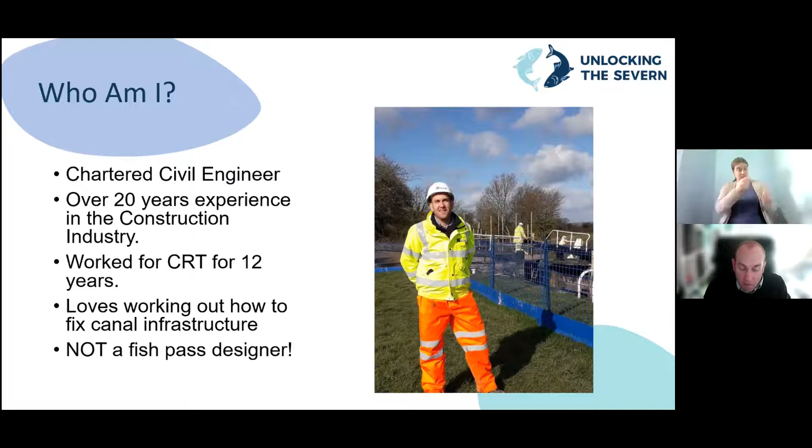I undertake a variety of roles, but my primary task has been to take the outline proposals for the fish passes, manage the detailed design process and ensure we have a buildable design, help resolve any issues found during construction, and perhaps most importantly, ensure that what we build meets the requirements to allow fish to use these structures. One important thing to note is that I'm not a fish pass designer. I work very closely with a team of experts who provide the information and guidance needed to ensure the structures work from a fisheries perspective.

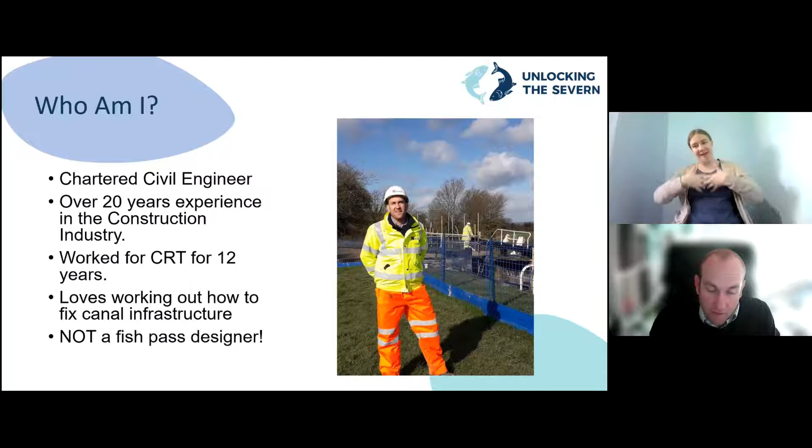So to start with, why do you need fish passes on the River Severn? During the Industrial Revolution, the River Severn became very important for carrying goods and materials. In 1824, it was noted that the river is navigable the whole way, but navigation is very much impeded by the lowness of the water in summer and by the floods in winter. In the 1840s, navigation on the River Severn was improved by the construction of a series of weirs and locks.

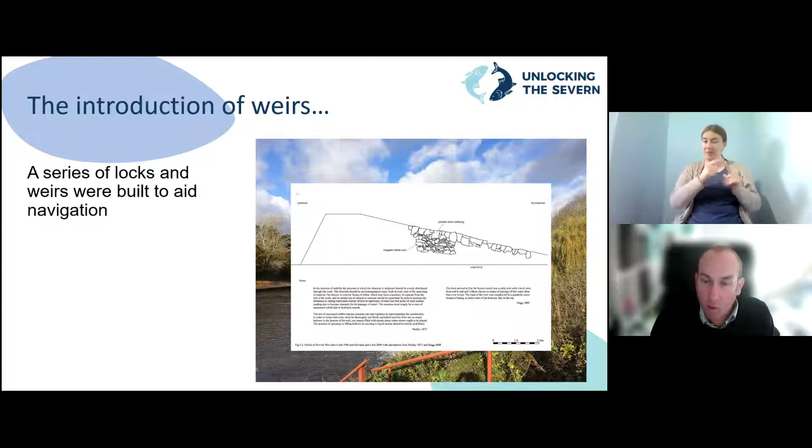This photo shows a typical weir on the River Severn. These are large structures designed to increase the depth of water upstream. The cross-section shows that they were constructed from large rocks encased in an early form of concrete. The water level upstream is roughly 2 meters higher than the water level below. Almost immediately after the construction of the weirs, the impact on migratory fish was noted, as you can see from this quote from a fisheries report in 1862: The finest river in England is nearly ruined by building walls across it, sufficient to stop everything except a large and powerful animal.

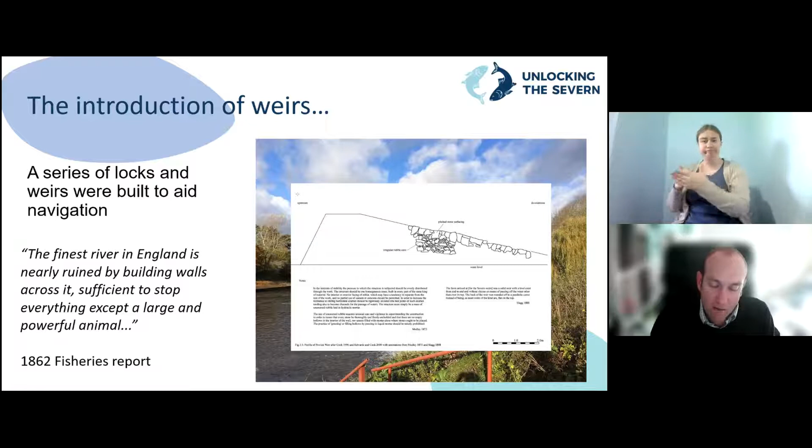Works were undertaken to improve fish passage relatively soon after construction of the weirs by the provision of notches in the weir crest to give a flow of water for the fish to swim up, which is what you can see in this photo here. This is Diglis before we've done our works, and this was the original fish pass. This worked for more powerful fish, such as salmon, but didn't help weaker species, such as the twaite shad.

So where are the weirs? Weirs and locks were constructed along the river in 6 locations: at Gloucester, Upper Lode, Diglis, Bevere, Holt and Lincomb. The bottom 2 weirs are tidal, so the fish can simply swim over them at high tides. Our project has therefore focused on fish pass provision at the weirs around Worcester.

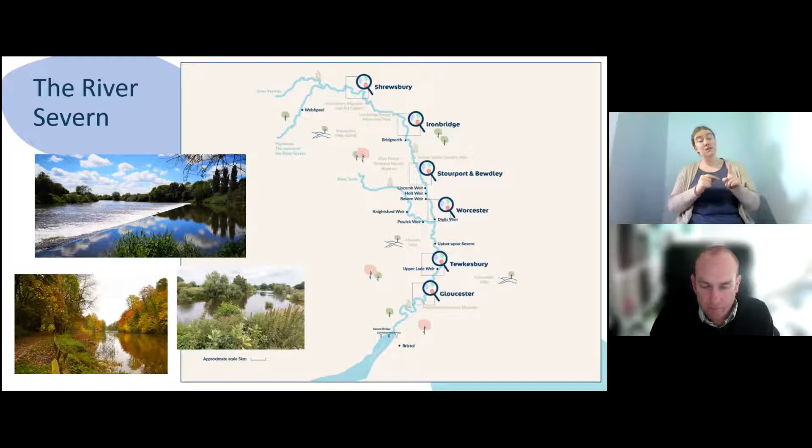If you've attended other Unlocking the Severn talks or events, you'll know that our target fish is called the twaite shad. The populations of this fish were devastated by the construction of the weirs as they were not particularly strong swimmers and were unable to make it over the weir at Diglis. From a design perspective, by targeting the weakest swimming fish on the River Severn, it should mean that all other fish will be able to use the new fish passes.

So how do you overcome the weir problem? The simplest method to enable fish passage is the removal of the obstruction. This approach has been taken at Powick Weir on the River Teme. Here, the existing weir has been partially removed and the riverbed regraded so that it is a much shallower gradient that allows fish to swim up.

Unfortunately, it isn't possible to remove the River Severn weirs without impacting on the navigation. Therefore, it is necessary to design a new structure adjacent to the existing weirs that allows fish to pass. So what is a fish pass? It is defined by the Environment Agency as any form of conduit, channel, lift, other device or structure which facilitates the free passage of migrating fish over, through or around any dam or other obstruction, whether natural or man-made, in either an upstream or downstream direction.

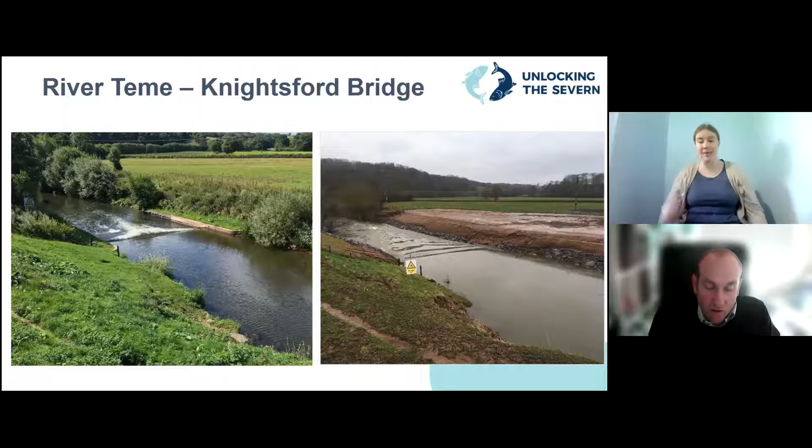There are many different types of fish pass that could be used. A good example of a more simple structure is here at Knightsford Bridge Measuring Weir, again on the River Teme. In this case, it wasn't possible to remove the weir, so instead the weir length was increased by placing rocks on top of the existing weir. This reduced the slope gradient of the weir, which in turn reduces the speed of water as it flows over it to the speed at which our target fish can swim up it. Where there are natural constraints and space is limited, more sophisticated fish pass structures are needed.

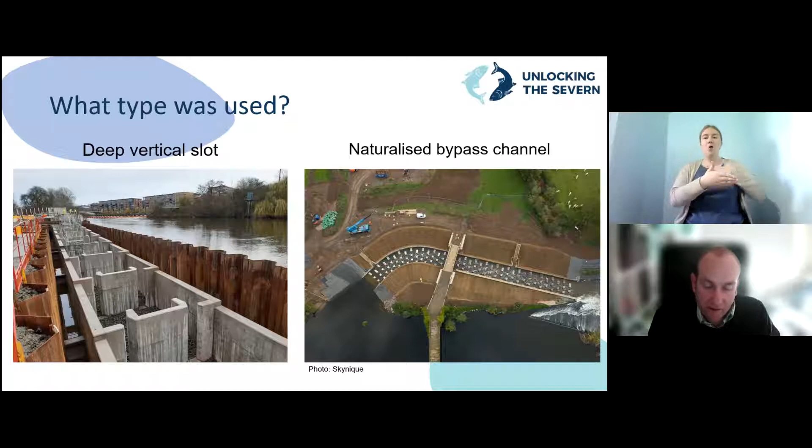For the weirs on the River Severn, 2 different types of fish pass were chosen. Deep vertical slots at Diglis, Holt and Lincomb, and a naturalised bypass channel at Bevere. The deep vertical slot fish passes have been used at the sites where less space was available. Both types of fish pass have a series of small steps designed so the fish can use their burst speed to get up to the next level, catch their breath before going again. How the structures achieve this is very different, and I'll explain this in more detail.

This talk is going to primarily focus on Diglis Fish Pass, which is the first weir requiring improved fish passage on the River Severn, and I'm able to explain the key design features along with the specific challenges of building them on the following slides. The key features of the deep vertical slot design used at Diglis are the gradient is greater by approximately 50% than a naturalised bypass channel, as less space was available. The overall fish pass length is approximately 80 metres compared to 120 metres for the naturalised bypass channel at Bevere.

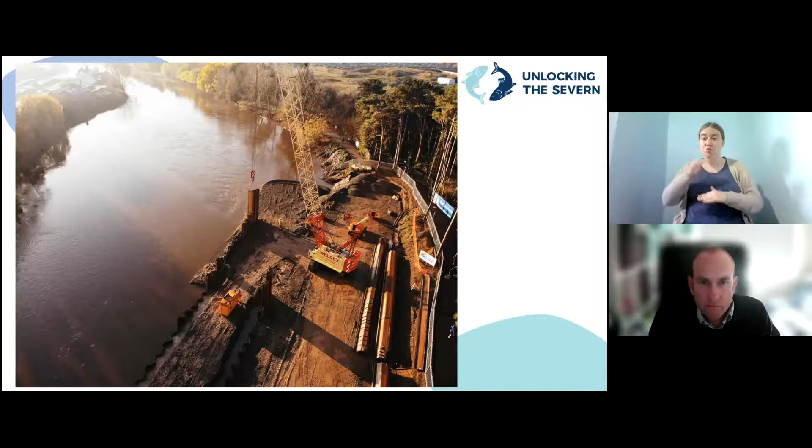Very long and heavy piles form both the temporary restraint and permanent outer walls of the structure. This is why they're called deep vertical slots, as the bottom is up to 7.5 metres below the adjacent riverside path, which is roughly the same as a 3-storey house. The ground inside the piles, after they were installed, is removed. The photo on the left shows us undertaking this. This was a massive undertaking with over 4,000 metres cubed of material excavated. This is roughly the same as 3 Olympic-sized swimming pools.

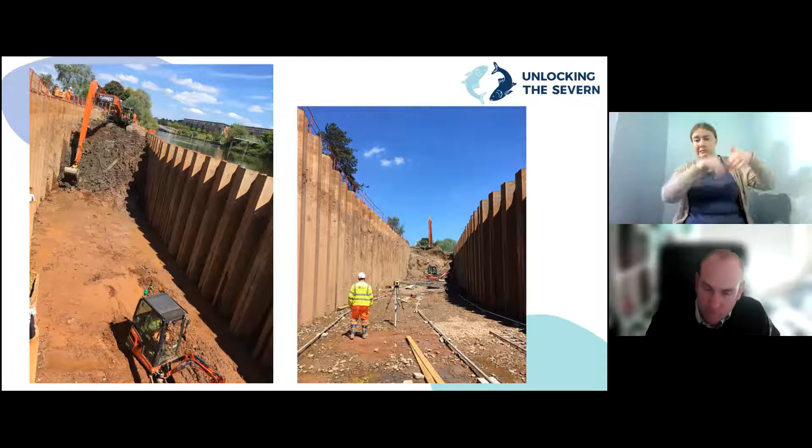The fish pass itself was constructed inside the piles using reinforced concrete. The steps for the fish to climb up are formed by the construction of a series of pools with what we call nibs and C-sections at the upstream end. Together, these create a small slot that the water passes through so that the target fish is able to burst through before resting in the pool above. The photo on the right shows the construction of these nibs and C-sections. This may be easier to understand by looking at the plan drawings of these pools.

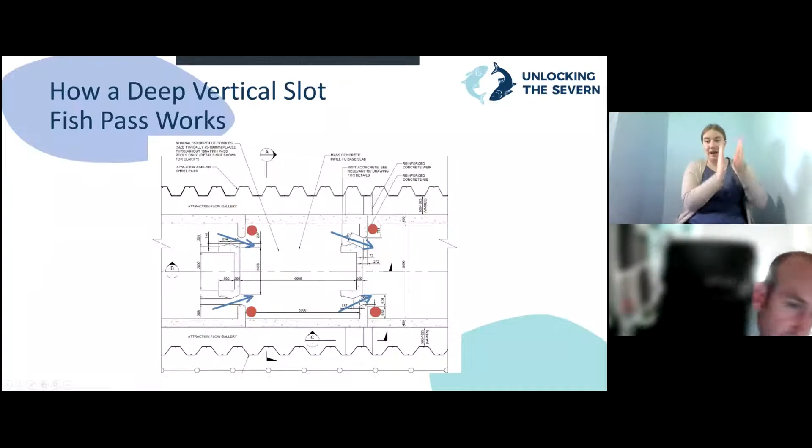Water passes, I'll just go back, so these are the nibs here and the C-section here. And in plan, we've got the nib and the C-section. Water passes between the nib and the C-section, as I've shown by the blue arrow, before being held up in the pool below, and the process repeats as it passes down through the fish pass.

The flow of water should create eddies and calm spots where the fish can wait, as shown by the red dots, before the fish dart through the gap into the pool above. The water speed is at its fastest as it passes through between the nib and the C-section, but it's been designed so that it doesn't exceed 2.5 meters per second, which is slower than the fish's burst speed.

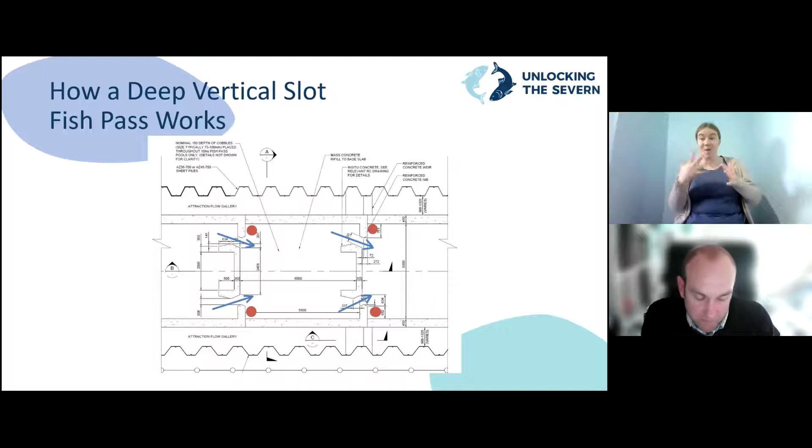In this sketch, I've tried to show in blue how the water will step down as it passes through the fish pass. I think it's easy to understand how the pools will form a series of small steps for the fish to swim up.

At the bottom of the fish pass, the water flows come together through large screens designed to smooth the flow of water and stop fish from swimming up these channels.

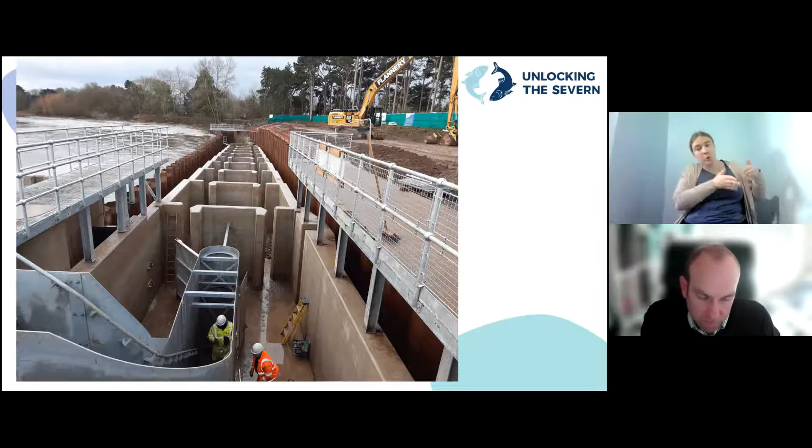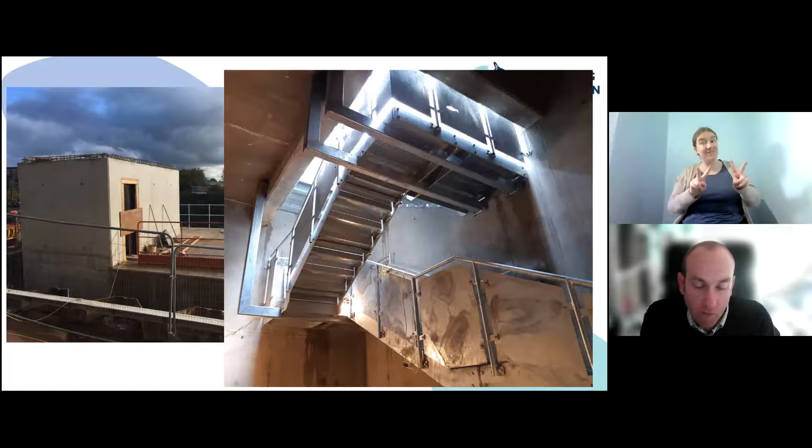At Diglis Fish Pass, there is an underwater viewing gallery and window that will be used for scientific monitoring of the fish using the pass and as an education facility for schools and members of the public. The building on top of the viewing gallery has been designed to go underwater when the river floods and has a waterproof door to stop water entering the building.

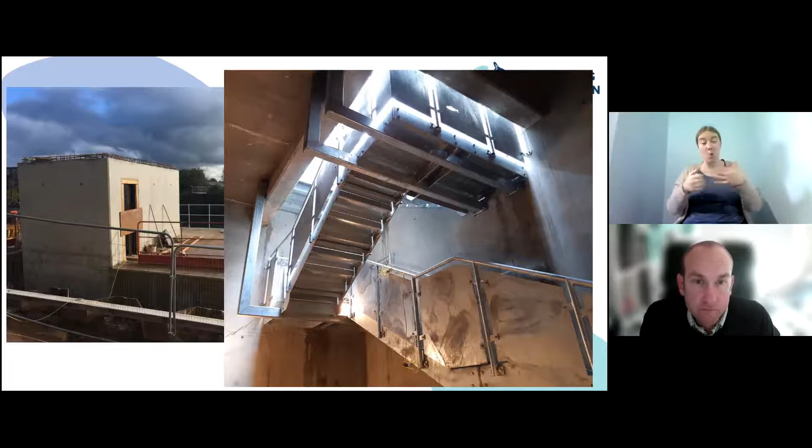In this photo, you can see our underwater window that we've designed to withstand being submerged by over 8 meters. We had to go to a specialist that supplies windows to the Sea Life Centre. The window is at the largest size that can be manufactured in the UK in one piece. The window is constructed from 4 laminations of glass, each 20 millimeters thick and having a total weight of 1 ton. The front lamination is designed to be replaceable should it be needed in the future.

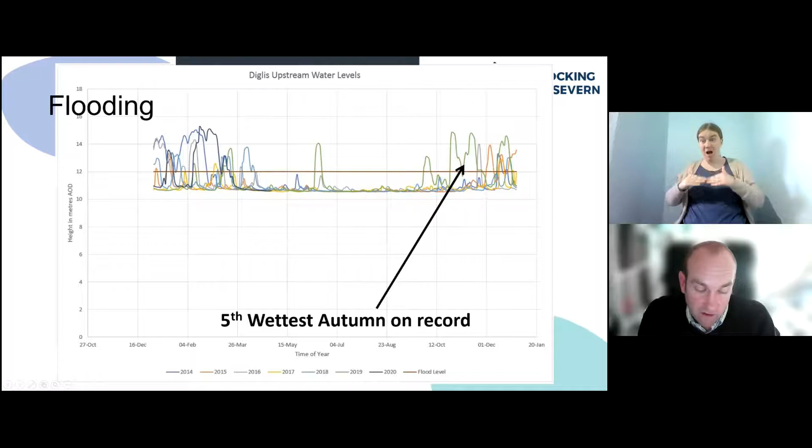We decided to protect the works up to a level of 12 meters, which is shown by this brown line. And as you can see, the maximum recorded flood level is about 15.3 meters. And this green line shows the river level in 2019 and 2020. So quite often we were above our flood level. And at times the works area was over 3 meters underwater. And here's a few photos showing that. We were flooded out numerous times.

However, at Diglis, the site tends to flood for 5 to 10 days before dropping, and it allowed the works to progress once it had dropped. In the left-hand photo, you can just about make out the fence to the edge of our fish pass, and in the right-hand photo, you can see the flood door doing its job and stopping the water getting into our building.

Thought I'd share with you some key construction issues that were overcome during the works. I mentioned the piles that we used earlier. We used a specialist during the design phase. We decided to use a pile type called an AZ pile, which is basically shaped like a Z, hence its name.

And we planned to install them by drilling some big holes in what we call the clutch positions, which is where they join together. So if you can see my cursor in this position and in this position, we used the machine that we can see on the right to drill these big holes that allowed us to then break up the rock below that they were going into to allow us to put these piles in.

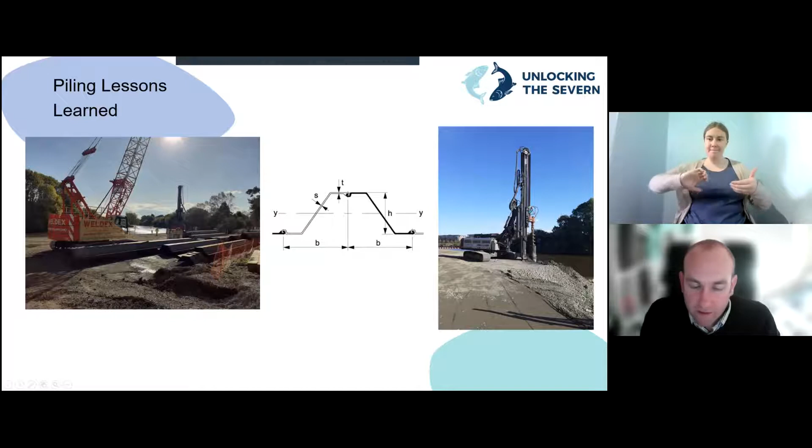These AZ piles were supplied in pairs, and because of that, the distance between these crimped positions was about 1.5 meters. What this meant was the big pile hammer we used didn't quite fit over the top of the pile. You can just about make that out in this photo on the left, where the hammer in red is trying to sit on top of the pile but isn't quite big enough to go all the way over the top.

This meant a lot of the energy from the pile hammer wasn't properly going into the pile itself, and we started to bend over the top of the piles. What we needed to do was weld strengthening plates, which you can see in this photo, to strengthen up the pile so we could hit it hard enough with the hammer to get it into place.

We learned from this when we built the similar fish pass at Lincomb, where we used a different type of pile called a U-shaped pile, which is a bit shallower and less wide, so that the hammer fits completely over the top, and we found that we could get them into place.

The other problem we found with the AZ piles was that they stretched slightly when manufactured and joined together, meaning each one was about 10 to 15 mil too long. So the overall length of the fish pass at Diglis is about 1 meter longer than what we intended because of that.

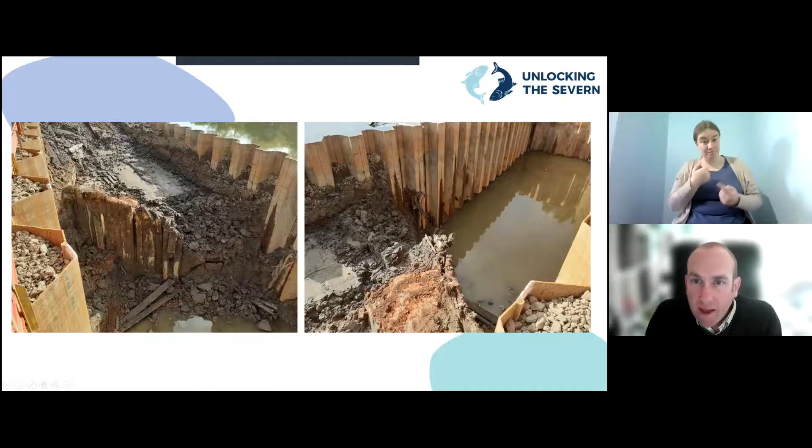You can just about make out the weir on the right-hand photo, and exactly in line with that, we found these timber cut-off piles. They were quite interesting because they had a cast iron point on the end for when they were put in 200 years ago, to be able to drive them through the ground. We then found it had been fully backfilled with clay to try and stop water leaking around the outside of the original weir when it was being constructed.

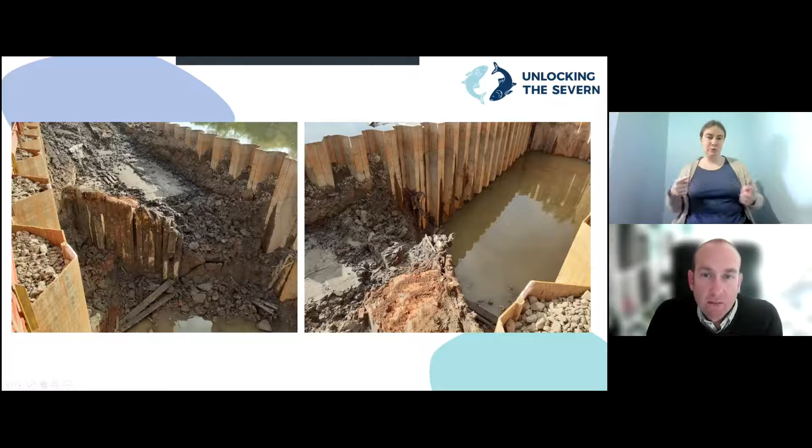We also had some issues piling through the existing weir. As I mentioned at the start of the talk, the existing weir is constructed from an early form of concrete and stone pitchings, and you can see these big boulders on the face of it in both of these photos.

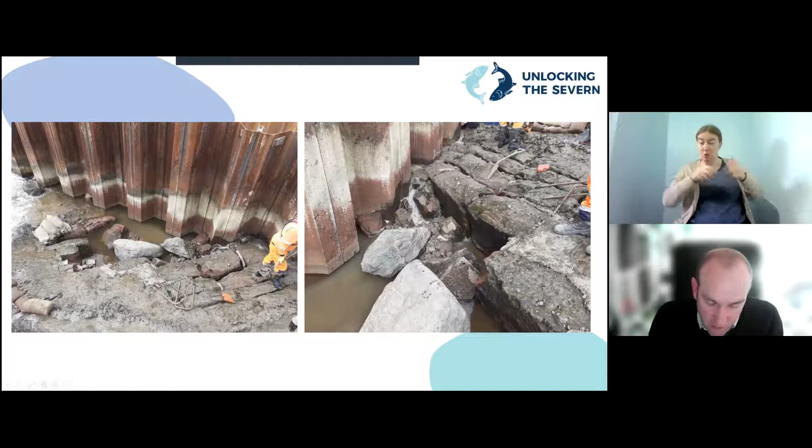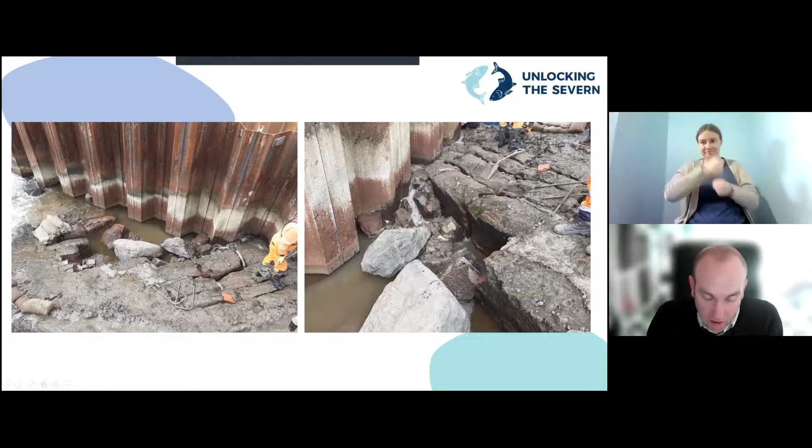We had to construct a platform out across the weir to give us access for construction plant to drill through the original weir itself, allowing us to then drive these piles through the structure. Once completed, we needed to make good the damage we'd caused in this area, to ensure over time that both the new and old structures remain tied together properly.

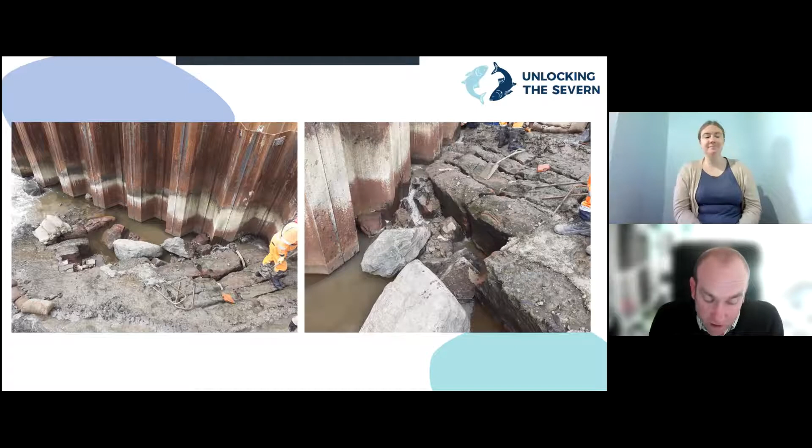The other issue we had during construction was COVID-19. If you've walked past the site on the Riverside Path in Worcester, you'll have seen that we needed to cross the public footpath to get to the works area. At the start of lockdown 1, we had to shut down the site temporarily whilst the situation became clear, so we could work out how best to manage this and the other works to ensure they remained COVID secure.

We've relatively recently completed construction of the fish pass, and it's now fully operational, which has been just in time for the spring spawning season for the twaite shad, which is ongoing as we speak.

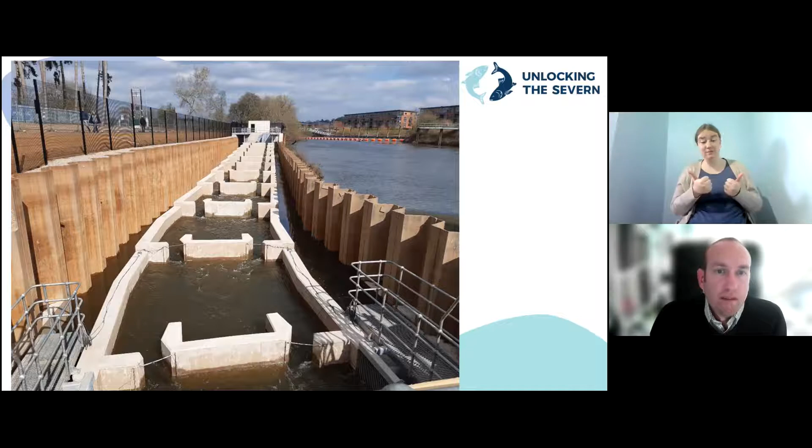So we've got a video of the completed works, which probably will show you better than I can explain. So hopefully this will work.

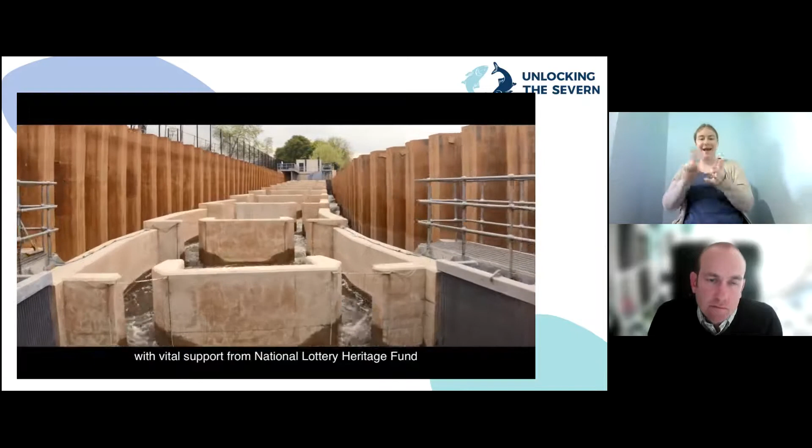Hi, I'm Jason Leach, Programme Director for Canal & River Trust on Unlocking the Severn. This is a once-in-a-lifetime opportunity to restore connectivity for migratory fish on the UK's longest river. Fish migration was severed about 180 years ago with the construction of the locks and weirs to facilitate navigation. The twaite shad population crashed almost overnight and has led it to be one of the UK's rarest fish today.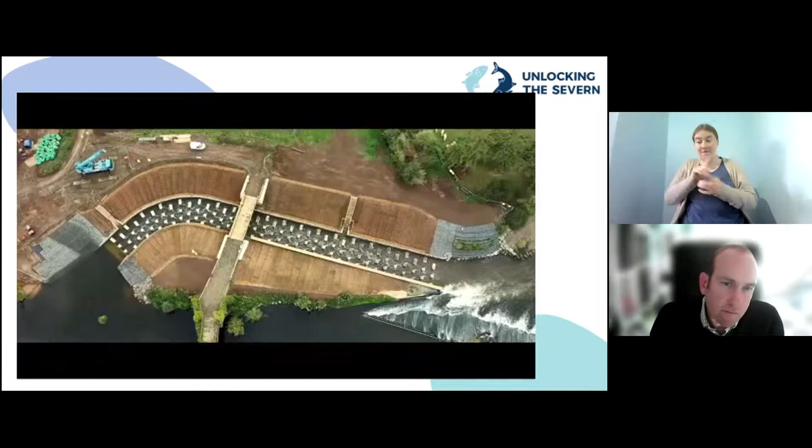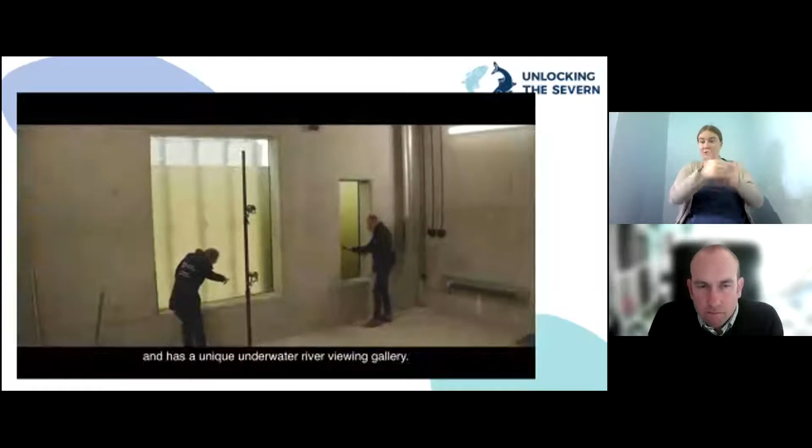We're building 4 big fish passes. Diglis, the biggest, at a massive 100 metres long, 8 metres wide and 5 metres deep, is the biggest deep vertical slot in England and Wales and has a unique underwater river viewing gallery.

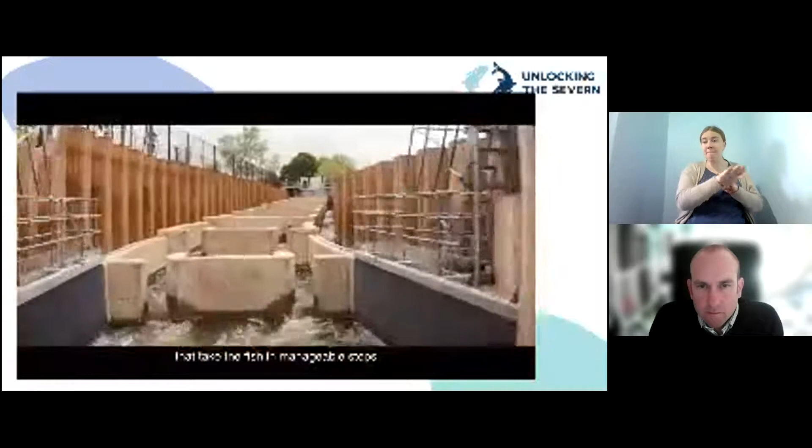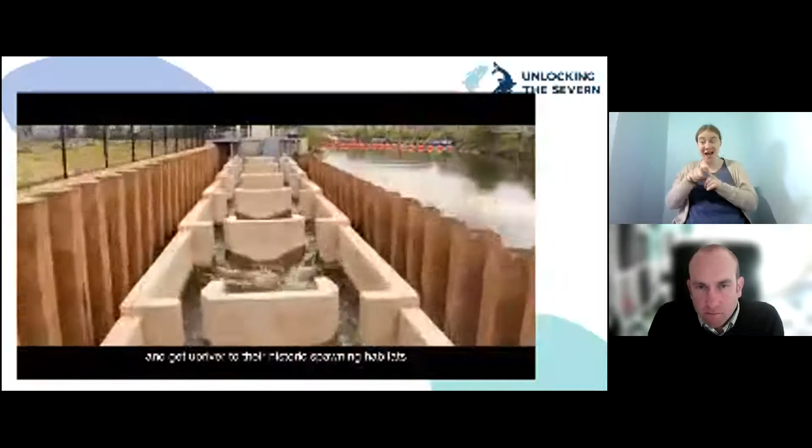The Fish Pass is formed of a series of ascending pools that take the fish in manageable steps from one level at the bottom of the weir to the higher level above it. This year, for the first time in nearly 180 years, Thwaite shad will be able to pass and get upriver to their historic spawning habitats where they'll have a better chance of reproducing. This fish pass will also benefit other endangered fish species, including salmon, eel and lamprey.

The window in the Fish Pass will be used for scientific monitoring with specialist film equipment, but we're also really looking forward to welcoming visitors, and we're going to put in audio-visual installations. Visitors will be able to book a visit to come down into the Fish Pass and see through the window into the flowing river and hopefully see some of its wild fish.

Hopefully you could see from some of the aerial shots how the pools and the sea sections work and create the steps down and the eddies for the fish to swim up. It's been a very exciting time for us, and we've had tons of fish coming past the window, and it's been very exciting seeing them go past and use the Fish Pass. We've had a few Thwaite shad go through over the last couple of weeks, so it's been amazing to be involved and seeing it work.

To complete the story of what we're building on the River Severn: as I mentioned earlier, the other type of fish pass used on this project is called the naturalised bypass channel, and this has recently been constructed at Bevere Weir. So how do these work?

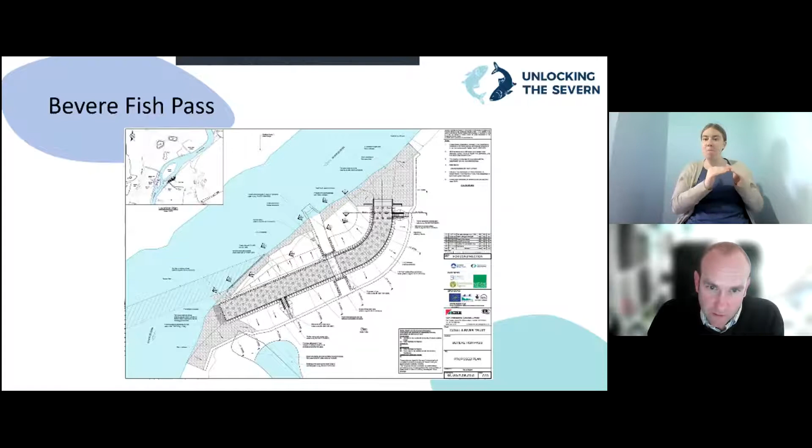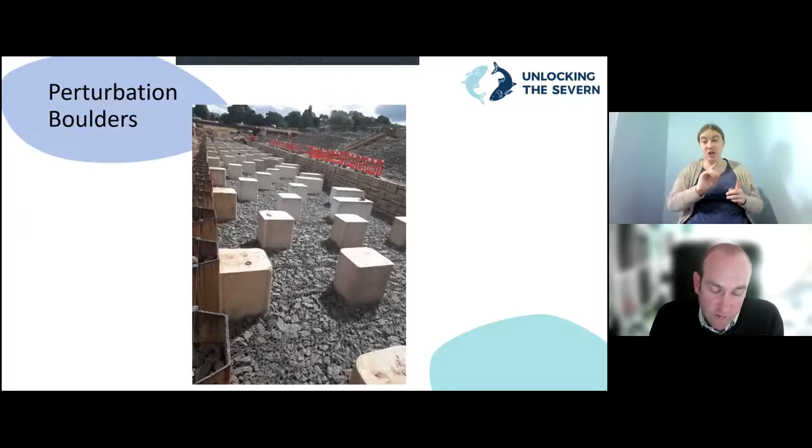These have a series of blocks known as perturbation boulders, which in this plan you can see as all these dots going up through the fish pass, and there's a picture of them during construction. These are essential to the success of this type of fish pass. These boulders have been carefully designed and positioned to break up the flow of water as it passes down the fish pass. This creates a series of water chutes and eddies.

The fish are able to burst through and rest before continuing upstream. So again, I've tried to show that - the resting spot is the red dot and their path is the green lines. So they hide behind the perturbation boulders and dart upstream.

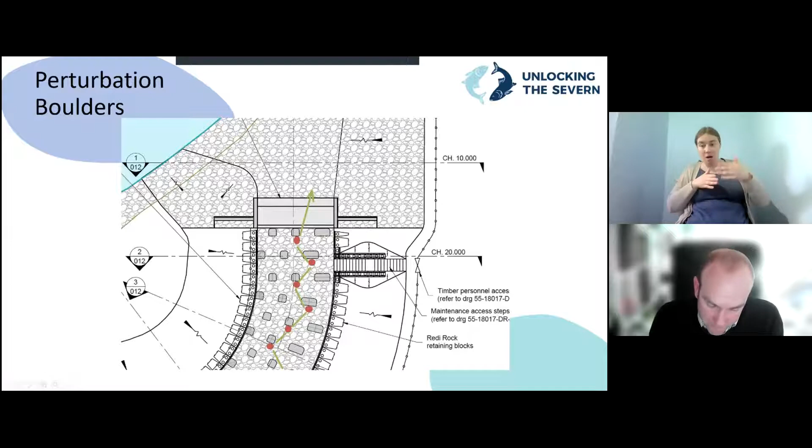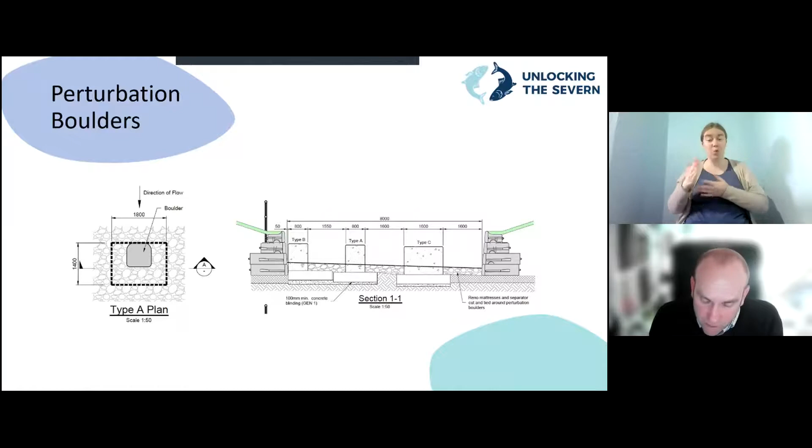If you look closely, there's a plan of our boulders. You can see that the edges of the concrete have been carefully designed to ensure that water flows through the fish pass uniformly. These boulders are much larger than they seem, so they're a bit like an iceberg with much more below the bed level. This is to ensure that they're big enough to withstand the forces of the flowing River Severn for at least the next 120 years.

I've got another video here, a short video showing this fish pass in operation.

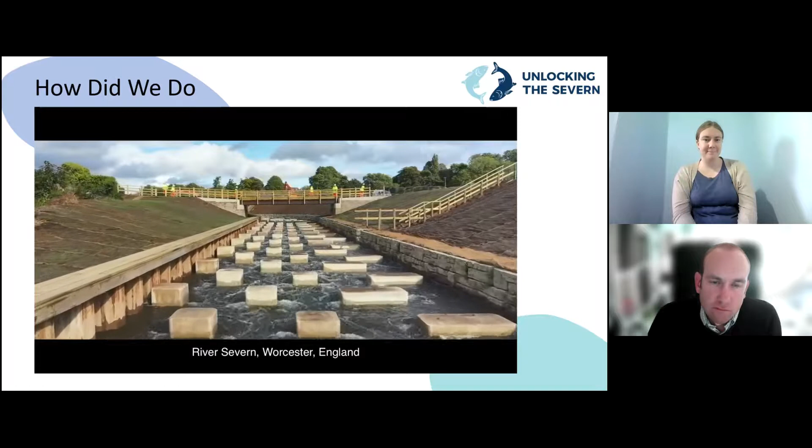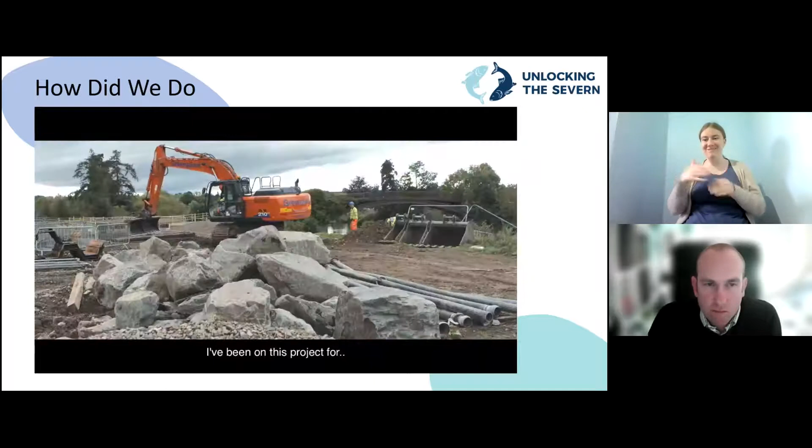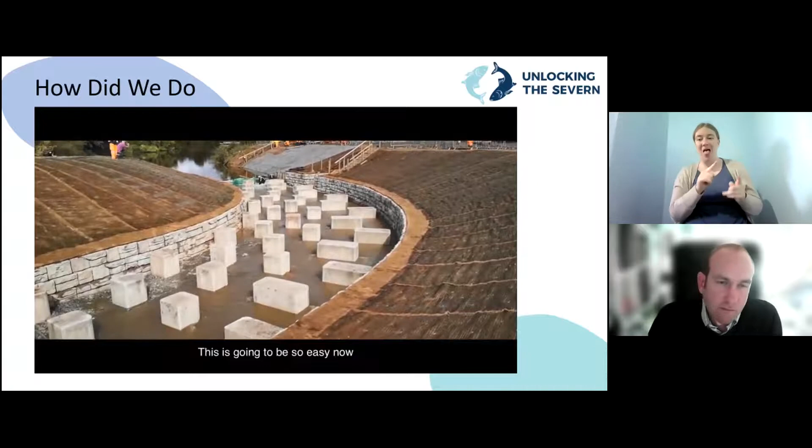Hi, I'm Charles Crundwell from the Environment Agency, and we're here today for the opening of Bevere Fish Pass. I've been on this project for 5-6 years, and it's just so exciting to see the water finally coming around in this common bypass behind us, bypassing Bevere Weir to my right. This is going to be so easy now for fish to come up - salmon, but particularly shad, which is what we're working on here - to move upstream and go back to their historic spawning grounds.

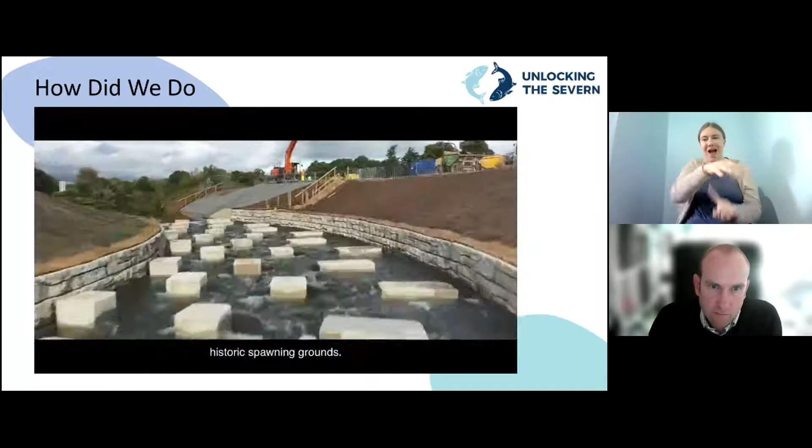So we've completed the fish pass at Diglis and Bevere, which are the first two weirs that block passage for fish on the River Severn. We've also completed, from a fish perspective, the fish pass at Lincomb, which is what we can see in this photo here. We're literally just finishing off the fencing and tidying up the field where we constructed it.

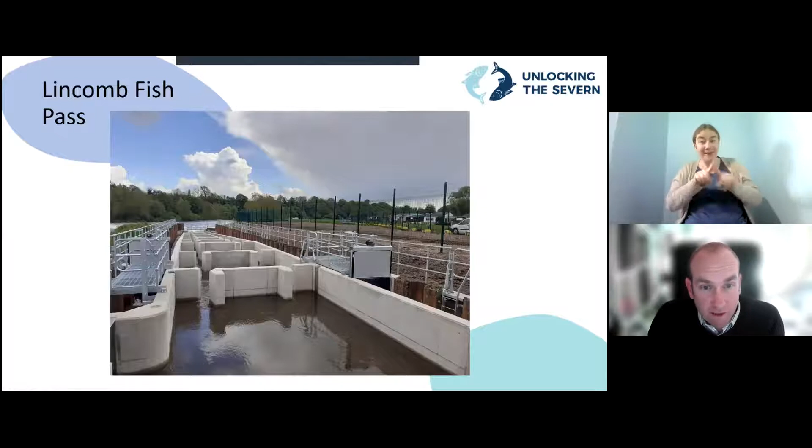So we're now constructing, it'll look very similar actually to this fish pass at Lincomb in between, though we've got a slightly different detail for retaining the ground on either side. We're hoping now for some really good weather over the summer to allow us to complete the construction of this fish pass, and that will be all of them done.

Unfortunately, it's not been particularly good weather in the last bit of May, so we're just hopeful that the weather we've had over the past couple of days continues now to give us a good run at getting this one built.

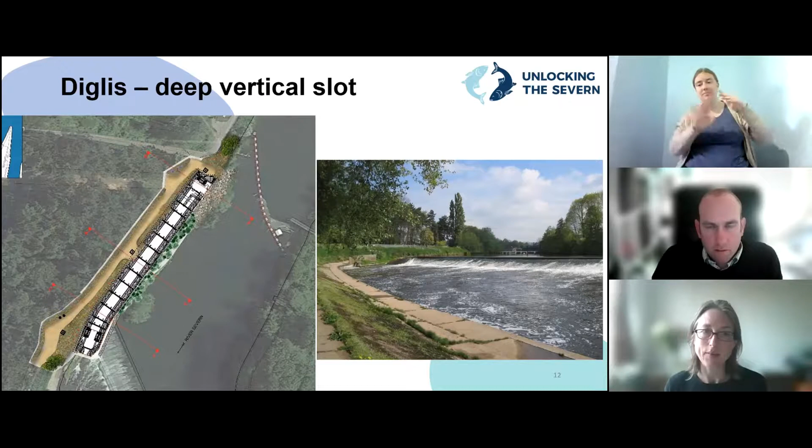I'm just going to go through some of the questions I typed a little answer to, just to check, because Richard may have some things to add. One was a question about how deep each section is, from the surface of the water to the base of the pool. I know we normally talk about the Fish Pass being 5 metres deep, but do you have anything to add on a typical water level within that, Richard?

So the maximum depth inside the Fish Pass itself is about 2.5 to 3 metres. This was during construction, but we've actually got a sloping base of rock that, when finished, fills in the bottom half metre to a metre, and the actual height of the water varies depending on what the upstream and tailwater river levels are doing.

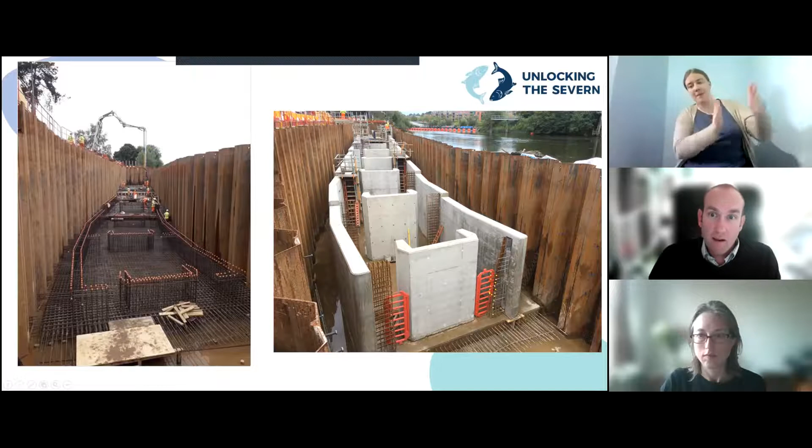At some points this week, for example, the water level downstream is about halfway up the Fish Pass, so you can't see the bottom 3 or 4 bays, just the top of this section. But in the middle of summer, when water levels are low, you'll see all 11 of the bays. And at times, as you saw in the flooding photo, it will be completely covered over.

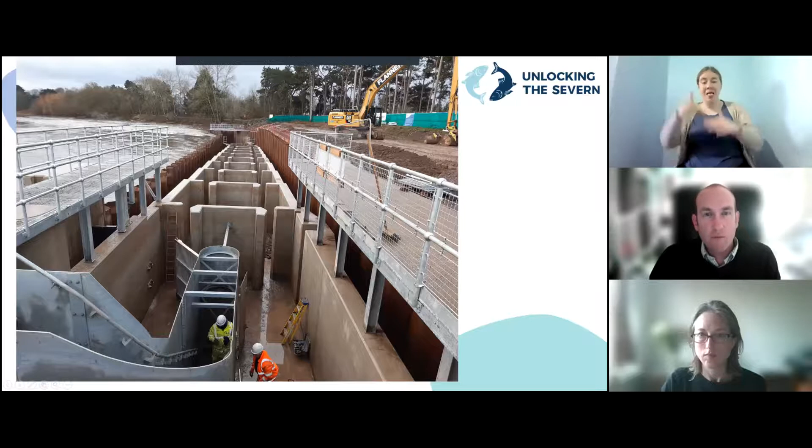But the deep vertical slot really is to do with how we've had to build it within retaining walls, which are probably almost at the bottom end twice as high as the actual Fish Pass itself through this area. Oh, that makes sense. Yeah, that makes sense now you say it like that.

Another question for you, Richard: how is the attraction flow altered? Maybe you could talk a little bit about the penstock gates at the top. Yeah, so again, I'm on the right photo here.

So here we've got what we call a penstock, which is effectively a big door that we can wind up and down to control how much water goes through this section. What we've found so far, with the river conditions we've had, is that we can fully open this, giving the maximum amount of water coming down through these channels. They go back down through - you can just about make them out here - these fish screens at the end, which divert the flow of water back into what flows through the Fish Pass itself.

Thank you. We have a question from Graham. As a fisherman, he's interested in catching more fish and releasing them. Will my catching record improve?

Well, we very much hope so. Be interested to hear where you're angling, where you're fishing from. These fish passes on the river are going to benefit all the fish on the river, and we're already seeing through the window in Diglis all kinds of river fish are using the pass. If fish can move more freely on the river, it's good news for them - they can reach better spawning habitats and use less energy getting over obstacles. Even salmon that can theoretically get over the weir have to expend a lot of energy and make lots of attempts, which can physically damage themselves. So opening up the river for fish to do what they would naturally do means we expect to see them, over generations, being more successful and having a healthy population on the river.

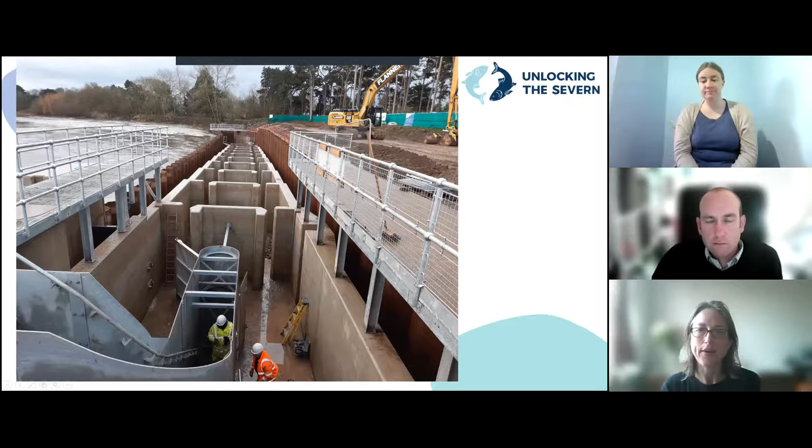Fantastic, thank you. Roger has a question: how will the success of the project be measured? Would you like me to speak about the monitoring, or do you want to? I'm happy for you to, Jenny. Okay, so part of our project is the scientific monitoring. That's one whole stream of what we're doing in Unlocking the Severn. And we are tagging fish and then monitoring how they move on the river.

So we started in the first few years with acoustic tagging. So we put in a tag, it lasts, I think, up to 3 years, and it has a little sonic ping, and there are receivers in the river, and each ping is unique to a fish, so we can track literally the movements of individual fish. And that's been really vital to see how the shad do move up and down, how they approach barriers, how it causes delays and problems, and how they don't get past Diglis.

So we'll be able to monitor the success for shad by seeing those individual shad coming past these structures using the fish passes, and getting upriver to better spawning habitat. And over time, over generations, we expect to see the size of the shad run increasing. So that will be the other way that we'll monitor the success.

In the Diglis Fish Pass in particular, there is another tagging system with a different kind of tag. It's called a PIT tag, which doesn't have a battery, so there's no limit to how long it lasts. And shad are repeat spawners. They can come back onto the river to spawn up to about 5 times. And that's activated as it passes through a loop within the fish pass.